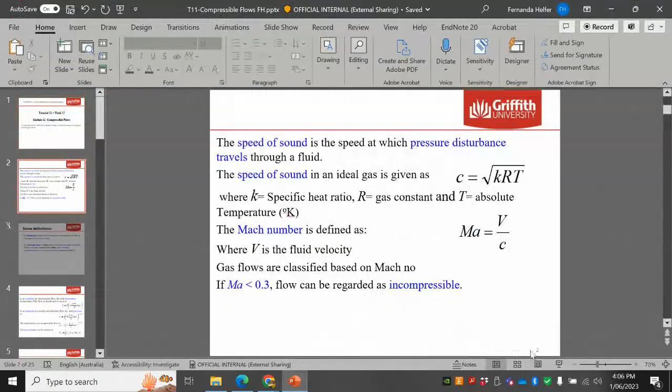So this week the topic was about compressible fluids. A compressible fluid is a fluid that when it undergoes a change in pressure, it also reduces or increases its density. For example, air, gas, steam. When under pressure, the density of these fluids will increase. So that's compressible flow. In the majority of problems, we don't need to consider the equations related to compressible flows.

But in some cases, particularly at high velocities, at high speeds, we need to consider different equations. We need to treat the fluids in a different way. And this happens especially when the flow is close to the speed of sound.

So that's why we use the Mach number, which is a relationship between the fluid velocity and the sound speed, the fluid speed to the speed of sound.

Above 30% of the speed of sound, we need to consider these different formulas, different equations, because then the compressibility of the fluid becomes important in the way the structure behaves.

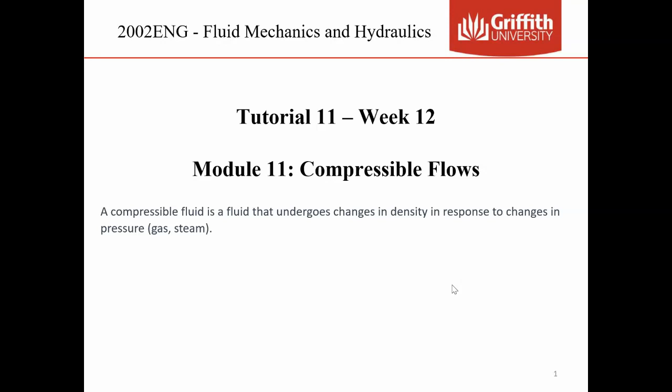So to calculate the speed of sound, which is a kind of property of a fluid, because each fluid has its own speed of sound. For example, air differs from water, differs from other gases, and that depends on temperature, depends on the specific heat ratio, and R, which is a constant.

So basically it depends on temperature. This K here is a property of the fluid. The temperature is another state variable, and R is a constant.

Now the Mach number, which is the ratio between velocity and the speed of sound, represents the percentage of the flow in relation to the speed of sound. So if a fluid has a Mach number equal to 0.3, for example, it means it's traveling at 30% of the speed of sound, which is the maximum speed achievable by that flow.

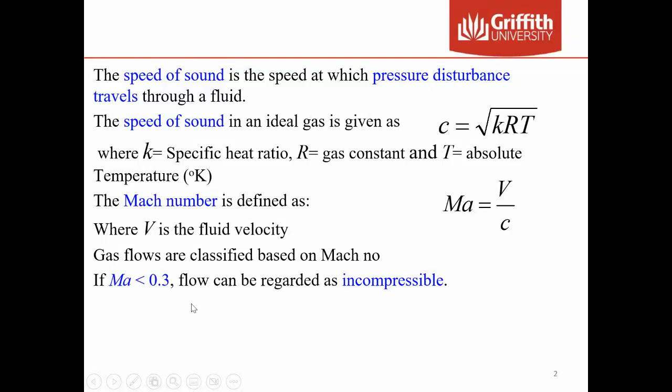So when the Mach number is below 30% of the speed of sound, or below 0.3, the flow can be regarded as incompressible. When it's above 0.3, then we need to consider compressible flow conditions.

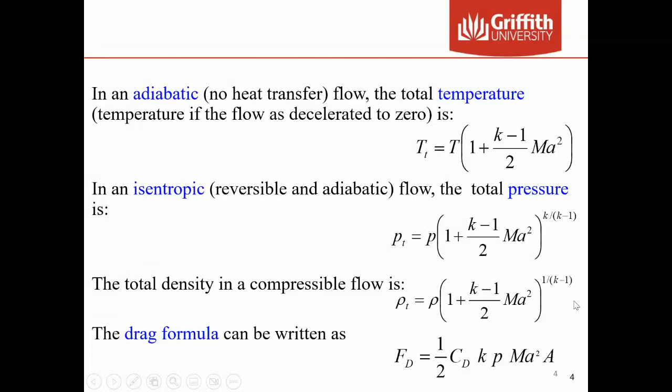So Amir talked about a lot of different equations for compressible flow, and they all use the Mach number as input. You can calculate temperature, pressure, and other things based on Mach number. I'm going to skip this part here, and I can explain that later if it becomes relevant in these questions.

So the first question: the velocity of propagation of sound is calculated by assuming the process is isentropic. Isentropic means that the process doesn't receive external energy or external heat, or lose heat, and there's no friction.

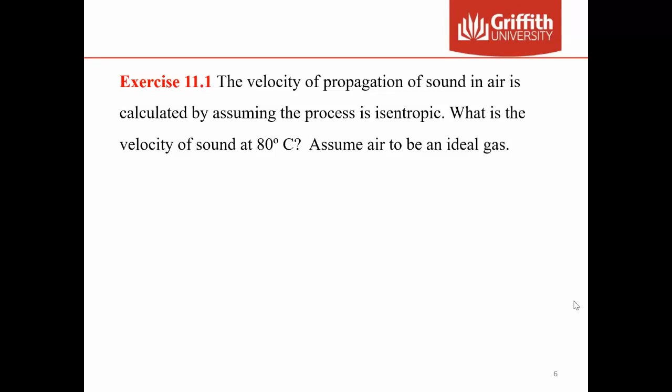Now, what's the velocity of sound at 80 degrees Celsius? As I said before, the speed of sound is calculated by this formula here. We need to enter this K value, which is the specific heat ratio, something particular to each type of fluid, and also depends on temperature, that K value.

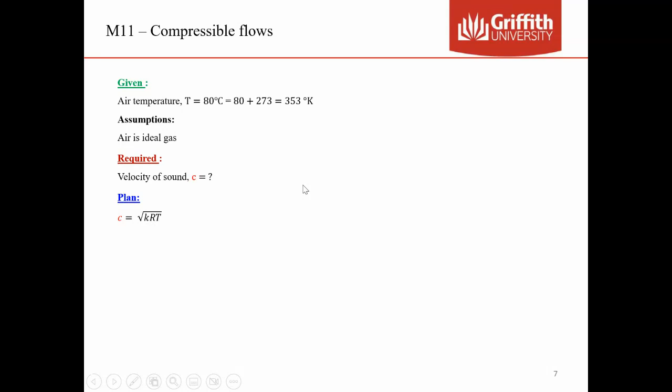Sorry, I don't think it depends on temperature, I think it's a fixed value. T is the temperature, and R is a constant, always the same value. So the specific heat ratio for air is constant and equal to 1.4. This R value, called the gas constant or universal gas constant for air, is this value. And the temperature here needs to be entered in Kelvin.

So you take the temperature in Celsius and add 273 to get the temperature in the Kelvin scale. Now apply the formula and you get the speed of sound for that temperature and for air. So that's a very simple one.

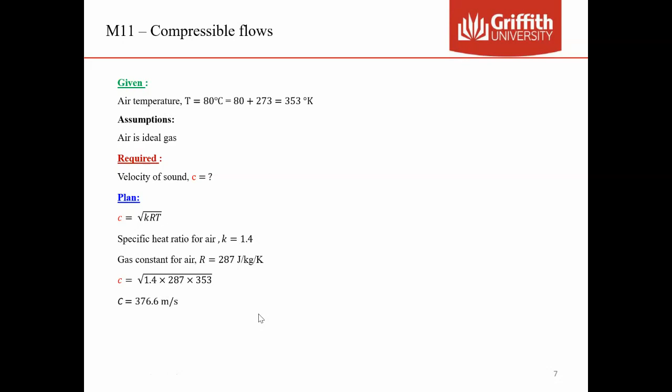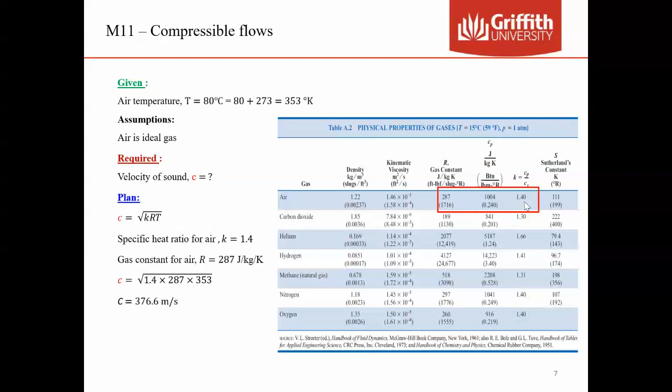And in our example, the fluid we were working with was air. So we used this value for R and this one for K.

So we've seen this already. Number 2: During a storm, lightning can often be seen to strike the ground before the accompanying thunderclap is heard. If an observer measures the lightning strike and the thunderclap to be 5 seconds apart, how far away is the storm from the observer? That's for a temperature equal to 32 degrees Celsius.

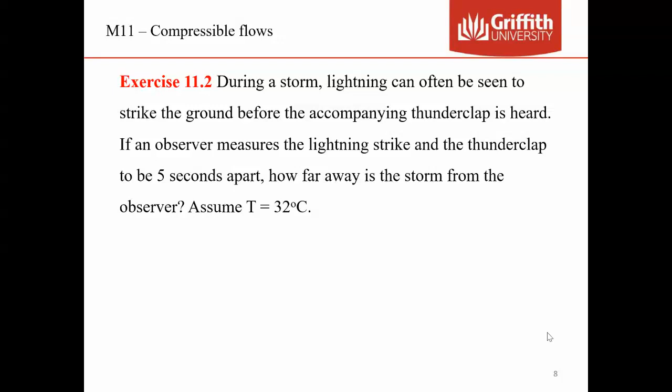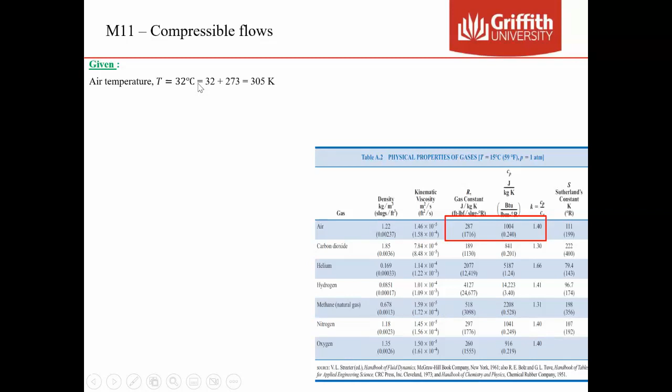So basically, we're going to apply the speed of sound here to check how distant this storm is from the observer. And the fluid is air, so we need to convert that to Kelvin by adding 273. We have the time of travel, which is 5 seconds.

Some assumptions: air is an ideal gas, so that means we can apply that formula for the C value for the speed of sound. Lightning is seen instantaneously - that's because we don't need to consider the speed of light. The distance covered, we will call it D, which is what we need to find.

Okay, so we know that velocity times time is equal to distance. So that's this part here. So distance is equal to speed times the time. So we need to find the speed of sound and then multiply by 5 seconds.

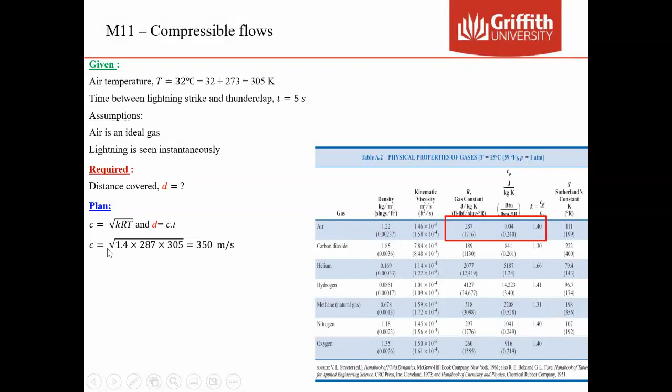To find the speed of sound, apply the speed of sound formula with K equal to 1.4, R equal to 287 joules per kilogram per Kelvin, and 305 degrees Kelvin - sorry, temperature in Kelvin.

From here, the speed of sound is 350 meters per second multiplied by 5. That equals 1,750 meters or 1.75 kilometers.

How long does it take for the light to travel? That's probably another question which was not part of the problem, but just out of curiosity. If you want to know how long it takes for the light to travel that distance, use a velocity of light, which is approximately 300,000 kilometers per second, and then you divide the distance by the velocity, and you'll find the travel time. That's to show you that the assumption that lightning is seen instantaneously is valid, because that time calculated is quite instantaneous.

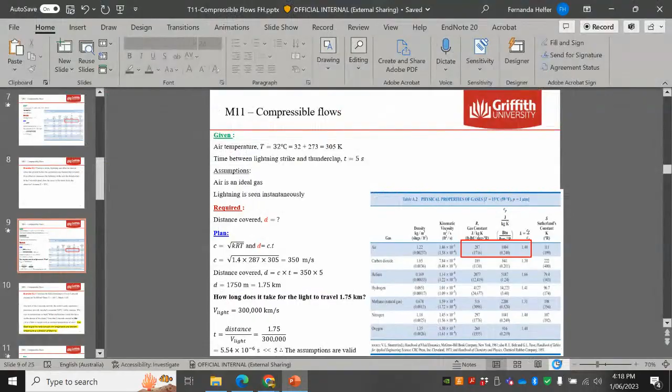Done. Okay, next one. Calculate the skin temperature of a civil aircraft cruising at 10,000 meters. The temperature is negative 50 degrees Celsius and Mach is 0.8.

So Mach allows us to calculate the speed of the aircraft, and the skin temperature - that will be the temperature of the outside of the airplane.

This part of the problem is, I think, just like an example of what happened once - what usually happens is that when this Concorde aircraft, which is the world's only supersonic passenger aircraft, the skin of this aircraft sometimes exceeds 100 degrees Celsius because of the velocity. This aircraft could achieve Mach equal to 2, meaning 2 times the speed of sound. That temperature of 100 degrees was reached even if the ambient temperature, the temperature of the surrounding air, was negative 60 degrees - it's because of the high speed of the fluid in friction with the skin of the airplane.

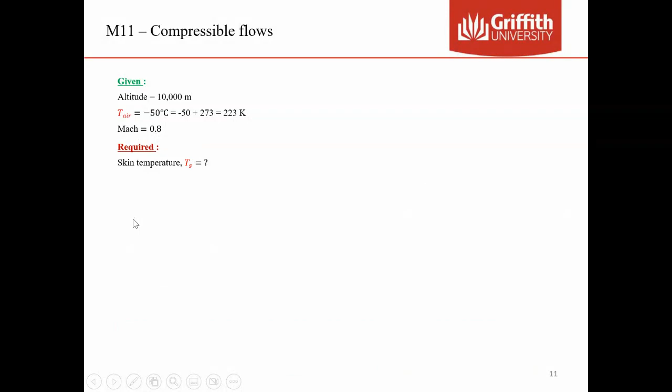The skin temperature is calculated by this formula here, which considers the ambient temperature - the temperature of the fluid around the aircraft - the specific heat ratio, and the Mach number. You can see here that the skin temperature is only a function of the speed, which is Mach, and the ambient temperature. So it's a very simple equation.

The temperature of the air is 223. K is 1.4 for air - remember that this would be a different value if it was a different fluid. And the Mach number in this case is 0.8.

Okay, so that gives us a skin temperature equal to negative 21.5, which if you compare that to the ambient temperature, you can see it's much hotter. So the skin temperature of the aircraft is hotter than the ambient temperature, which makes sense. The friction of air on the skin causes the temperature of the skin to increase.

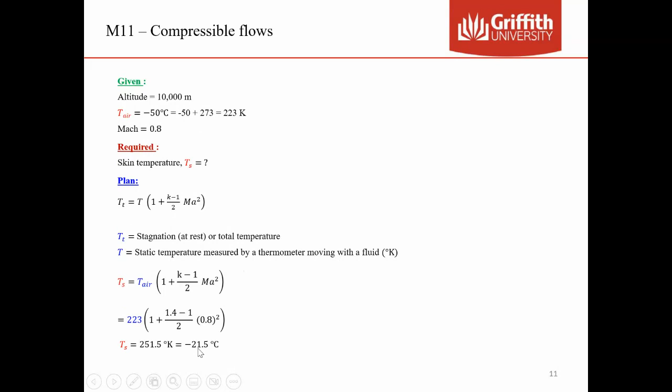And for the previous example it was negative 21 for Mach 0.8, and now it is 110 degrees Celsius for Mach equal to 2. That confirms what's said in this example: the skin of the Concorde aircraft, the world's only supersonic passenger aircraft, regularly exceeds 100 degrees Celsius.

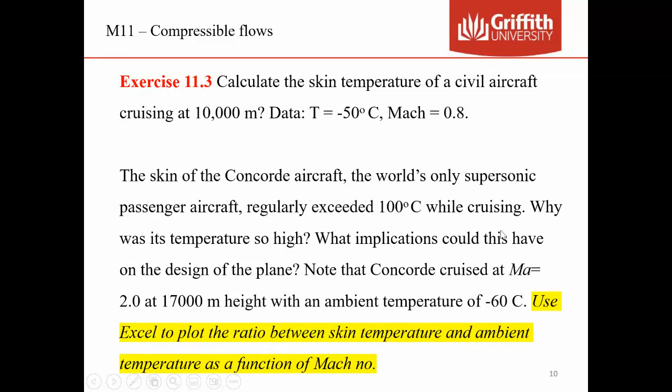Now the last part is for us to plot the ratio between the skin temperature and the ambient temperature against the Mach number. If you look at the equation for the stagnation temperature, you'll see that Ts equals T air times this term here. So if we move T air under here, we'll have the ratio Ts over T air, which is what we want to calculate.

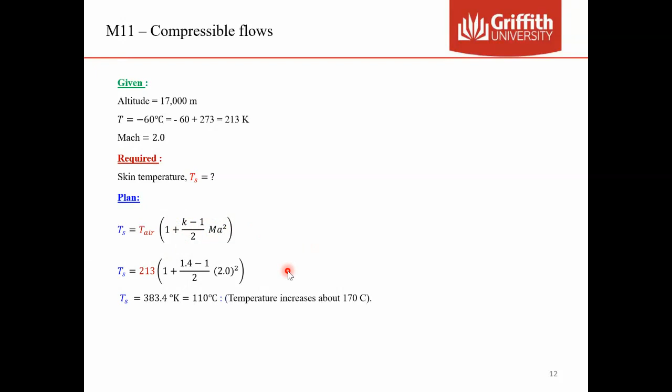So Ts over T air equals this. Then you can vary the Mach number. I just took this from Amir's slides; he used Mach 0.2 up to 2. So that means as we increase the Mach number, the temperature of the skin gets higher.

The ratio between skin temperature and ambient temperature increases. For Mach 0.2, meaning an aircraft traveling at 20% of the speed of sound, the temperature only changes by 1% — it increases by 1%. But when the speed increases to double the speed of sound, there's an 80% increase in skin temperature compared to the surrounding air temperature.

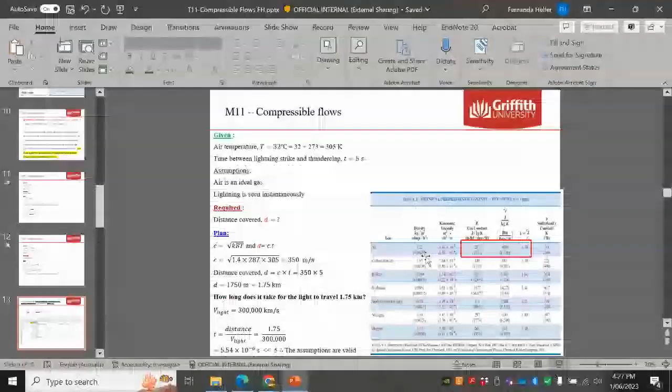Is ambient temperature being held constant for this table? Yes.

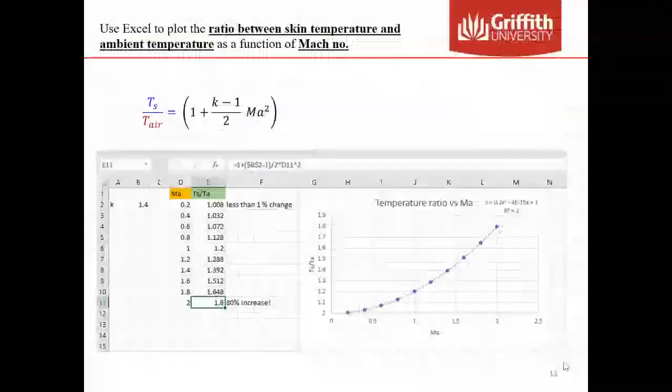It actually doesn't really matter. What's being plotted here is the result of this equation: you have Ts over T air as a result of this part of the equation. We're not going to use any number for T air to find Ts — you leave it as an unknown. Ts over T air is your unknown, and that's what you're going to calculate in this column.

Regardless of the air temperature, that ratio will always be the same. So if the temperature of the air is 10 degrees, for example, and the aircraft travels at Mach 2, this ratio is still valid, still 1.8. That means the temperature of the skin is going to be 1.8 times 10 degrees Celsius. So the ratio found here is fixed — these numbers will always be the same regardless of what temperature you're working with.

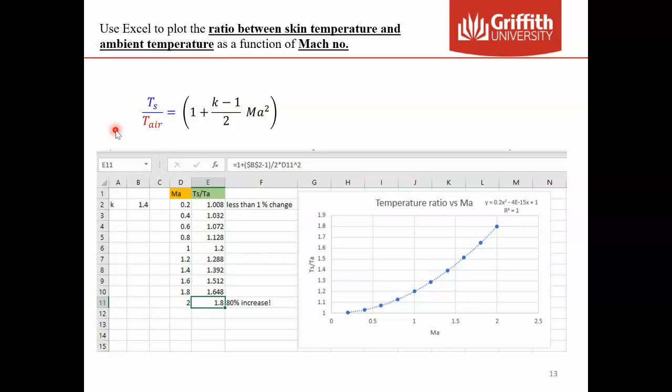Is that clear, Andrew? Okay.

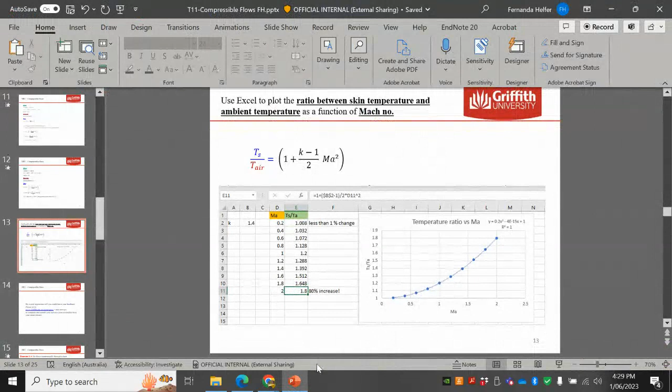We want to calculate the Mach number at this point, the stagnation temperature, stagnation pressure, and A star. A star would be the area of the constriction, and the mass flow rate, usually in kilograms per second — mass per unit of time — that's the mass flow rate flowing in this system.

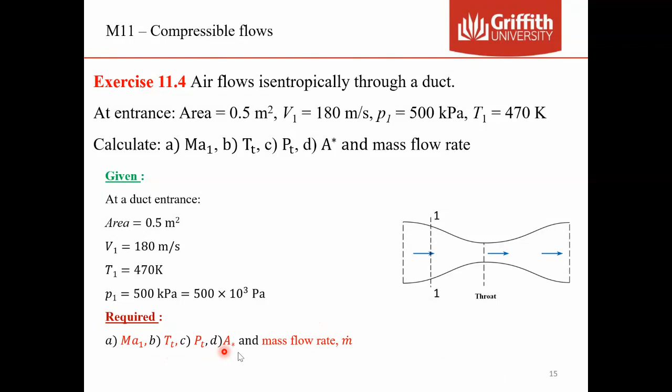So this was explained during this week in the lecture. You can refer to Amir's lecture, I think he went through all these concepts in more detail.

So to calculate Mach, that's the first part, to calculate the Mach value, which is the velocity over the speed of sound for that fluid. So let's calculate the speed of sound for the fluid, which is air. The K value is 1.4, the gas constant is 287, and the temperature is 470. Those values were all provided, the temperature was given in the problem. So the speed of sound for this condition, for this temperature and this fluid, is 434.6 meters per second.

The velocity is 180. So now we're able to calculate the Mach, which is the percentage in comparison to the speed of sound. So 180 divided by 434.6 equals 0.41. So this flow is flowing at 40% of the speed of sound.

Now, stagnation temperature. What would be the temperature if this fluid would be stopped, would stop flowing? What would be the increase in temperature for this particular Mach number? So we need to enter the ambient temperature and the Mach number to find that temperature. So that's 470, which is the temperature, 1.4 is the K value, and Mach is 0.41. So the temperature would be 486.1 Kelvin.

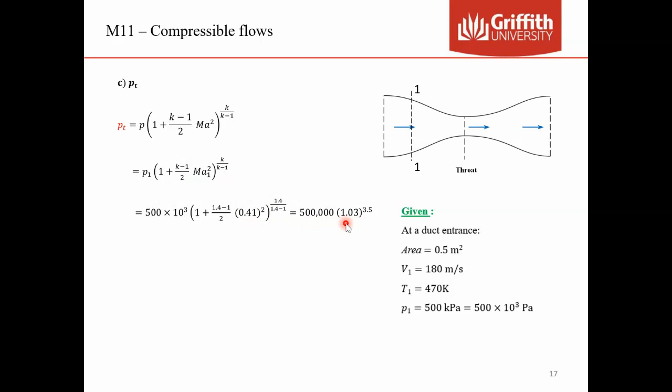Now, with the stagnation pressure, which is the same thing, what would be the pressure if this flow would be brought to rest? So that's the static pressure, which is 500, the current pressure, and here it's converted to pascals, so that's why it's multiplied by 10 to the power of 3. And here is the 1.4 for K value. The Mach number is 0.41, calculated before. This exponent here is this part of the equation. So that equals 562 kilopascals.

So when a fluid is brought to rest, it would increase, it will have its maximum pressure because the velocity would be the minimum velocity, and that's called the stagnation pressure.

Now part D is to find the area of this constriction.

Now to find the area of this constriction, you can apply this equation here, for it's called the Laval nozzle. This type of duct design is called the Laval nozzle, which has this converging section, and then there's a throat in which the velocity is maximum, pressure is at minimum, and then we have the diverging section in which the velocity starts to decrease, pressure starts increasing again.

So we can apply this formula here to find this A star, which is the area of the throat, the sectional area of the throat. So if we look at all these terms here, we need to use the Mach number for a given known area. So we know this area here, which is 0.5, and we know that Mach value here, the Mach number for this location is 0.41 that we calculated before. So then for that area and that Mach number, we can find the A star, which is the constriction area.

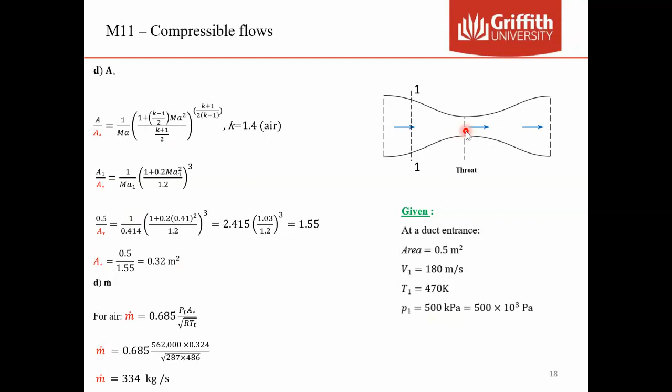It's a bit complex. Sorry if I couldn't explain it very well, but that's the best that I could do. Do you have any questions, Andrew? Okay.

All right, so let's go to the next one, which is the last one.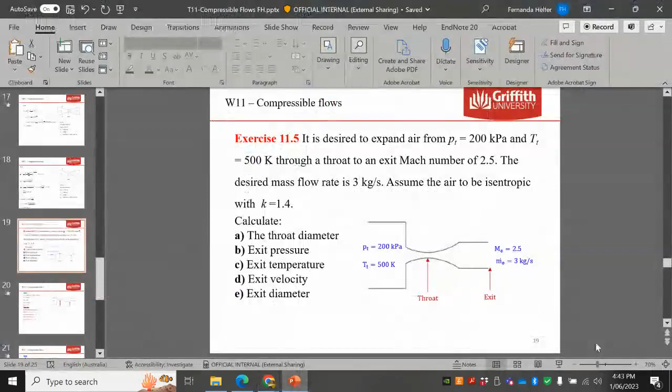It is desired to expand air from PT of 200 kilopascals, let me just change the pointer, and total stagnation temperature 500 Kelvin, through a throat to an exit Mach number of 2.5. So we need the velocity of the fluid here to be 2.5 times the speed of sound. The desired mass flow rate is 3 kilograms per second. Assume the air to be isentropic with K equal to 1.4.

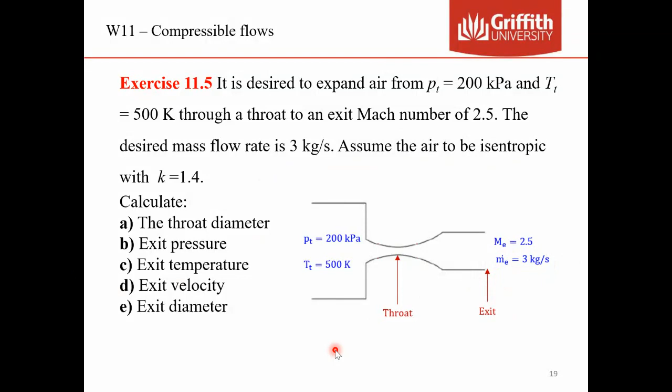Calculate the throat diameter, the exit pressure, the exit temperature, the exit velocity, and the exit diameter. Okay, so here are the given quantities. We have the pressure and temperature. We don't know the size of the throat, so we need to find the diameter of the throat, and also the pressure at exit, PE, the temperature at exit, velocity at exit, and also exit diameter.

Okay, because we know the stagnation pressure and temperature, since the fluid is at rest, we have the total pressure and total temperature. So we can calculate the mass flow rate. The mass flow rate is known, 3 kilograms per second. So we can solve for A star, being the cross-sectional area of the throat.

Let's have a look at everything here. 3 is the mass flow rate, R is the gas constant for air, TT is total temperature or stagnation temperature, and 0.685 is this constant, PT is the stagnation pressure, 200 kilopascals. So just solve this equation and you get an area equal to 8.3 times 10 to the negative 3 square meters.

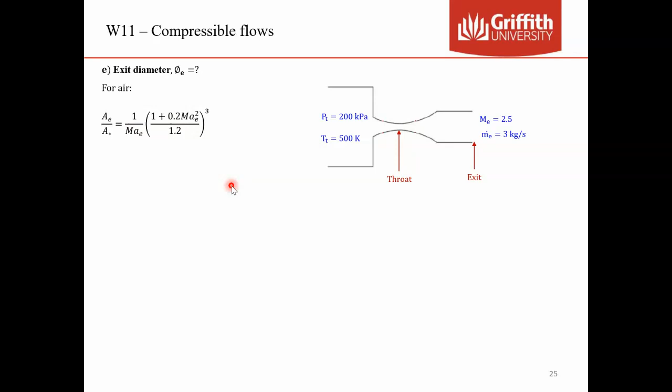And I think there's also exit diameter. The exit diameter is going to be, we know the throat diameter that we calculated before as a function of the mass flow rate, one of the previous steps, the first step. We know the Mach number at the exit, so we can find the area, using that formula I presented before with the ratio between area at one section divided by the constriction area. This was also explained by Amir during the lecture, have a look at the part where he talks about the de Laval nozzle. So there's a lot of theory surrounding this system of compression, then a throat, and then expansion. All these formulas are applicable to these designs. So the area at the exit is 21.9 times 10 to negative 3 square meters.

Entry area, no. Oh, there is a constriction area. The constriction area is the A star. And there's no entry area in the calculations.

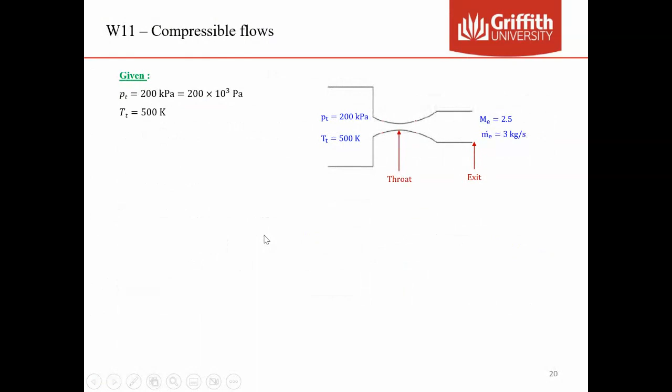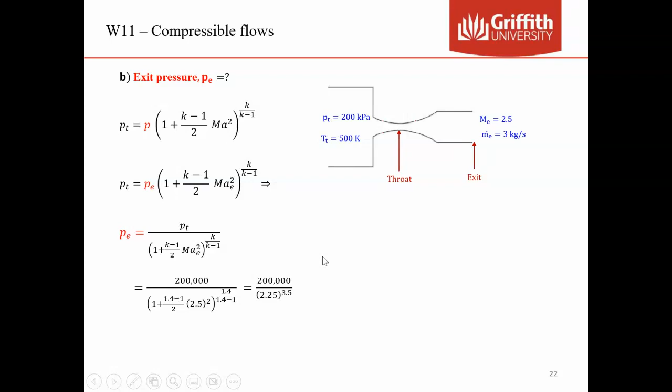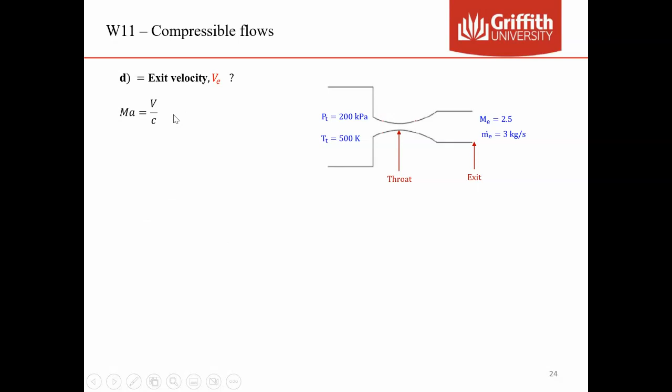So we start, the first part we start by finding the constriction area for that specific Mach number, which resulted for that specific stagnation pressure and total temperature. So then we found the size of the throat so that the fluid would be at speed of sound here at the throat. And here for the exit pressure, we only need to use the total pressure, which is like the maximum pressure achievable for this fluid. We use the maximum pressure or stagnation pressure formula and the Mach value. So again, at no point we need to use any area for this container here, just this area and this area here in our calculations. The exit temperature, again, is only a function of the total temperature and the Mach number. The exit velocity is a function of the speed of sound and the Mach value that is the requirement for our design. The design requires this Mach number, this Mach value requires the air to be at this temperature. So the design here is to find the sectional area of the throat and of this part here of this duct.

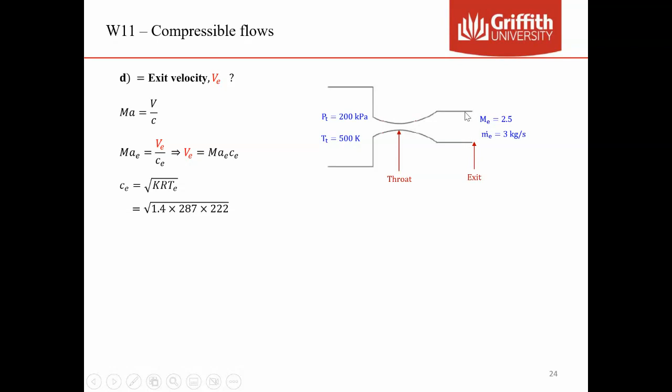So the exit diameter here is, after finding the area, you just solve for diameter. So that would be 16.7 centimeters for the exit diameter. So basically for this fluid, this air, in this condition in this container, using a throat of that particular size that we calculated before, it would achieve the speed of sound here, and then it would achieve a Mach number of 2.5 in this section with this design.